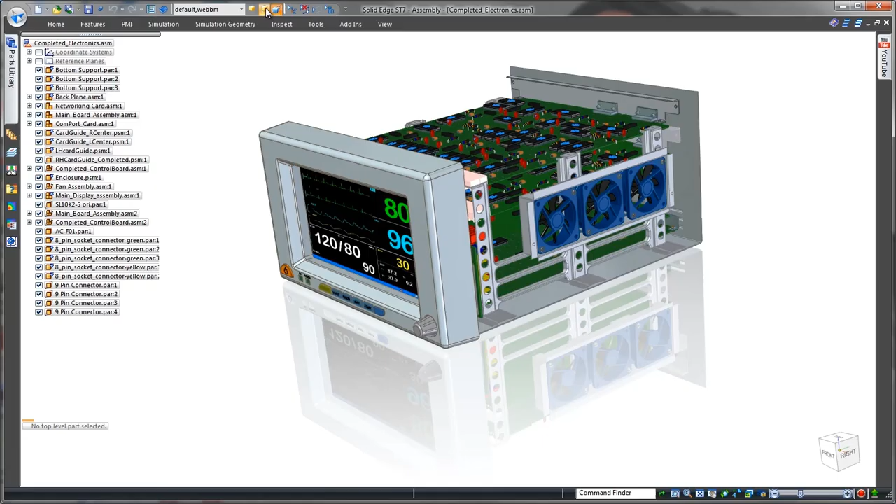We'll use Solid Edge to complete the enclosure of this heart rate monitor. Solid Edge with synchronous technology excels in sheet metal construction, allowing designers to efficiently work with surrounding components to define external product housings.

In most CAD systems, the user has to modify a part independently from the overall product assembly. With Solid Edge, additional flanges can be created at the top-level assembly just by selecting and dragging the plate's thickness faces. No special command necessary.

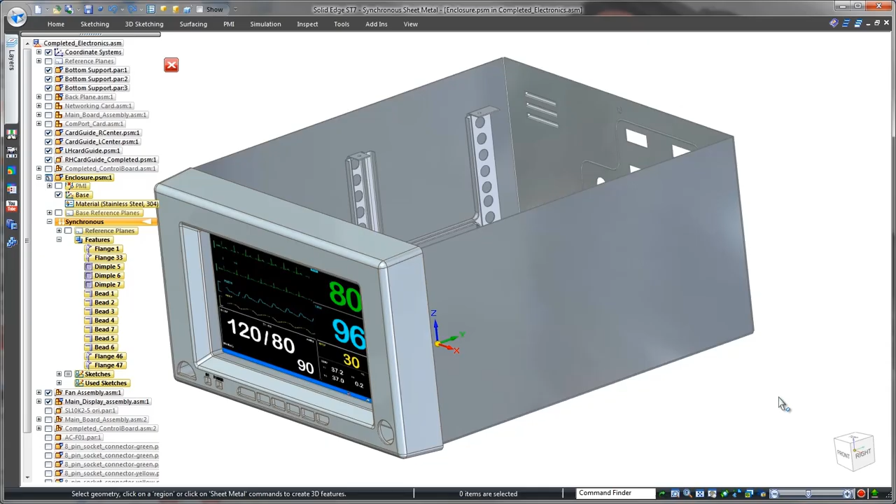Medical device manufacturers must adhere to strict government regulations, and any gaps between panels could be faulted. Using the close corner command, these gaps are eliminated.

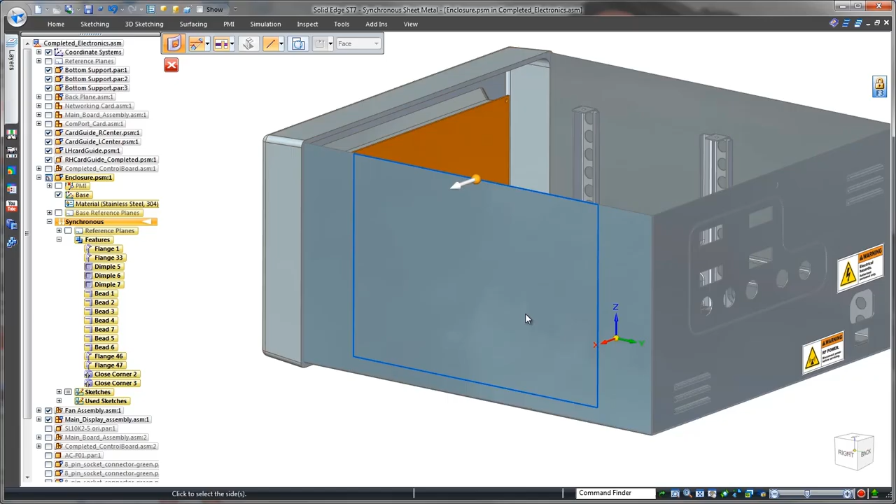The internal circuitry produces a large amount of heat, so normal operation of this monitor relies on cooling fans. To provide clearance for airflow, we'll define rectangular cuts on both sides of the enclosure. Synchronous modeling provides several methods to intuitively match the size of these openings to the shape of the fan assembly. Now that was fast and easy.

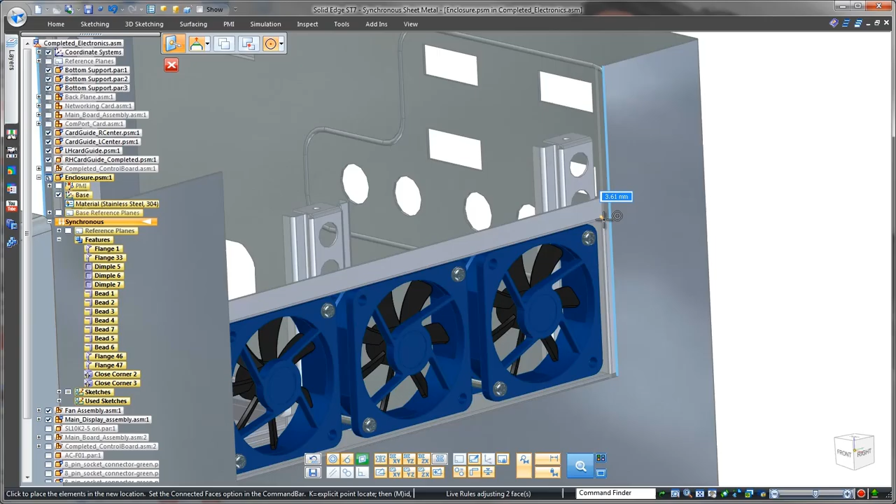Next, we need to create a locking tab for the enclosure's lid. Here we'll select the thickness face, but opt for a partial flange to create this tab. Using one of many handy options, we'll ensure its top is flush with the top of the part. We'll lock in a precise tab location using 3D dimensions.

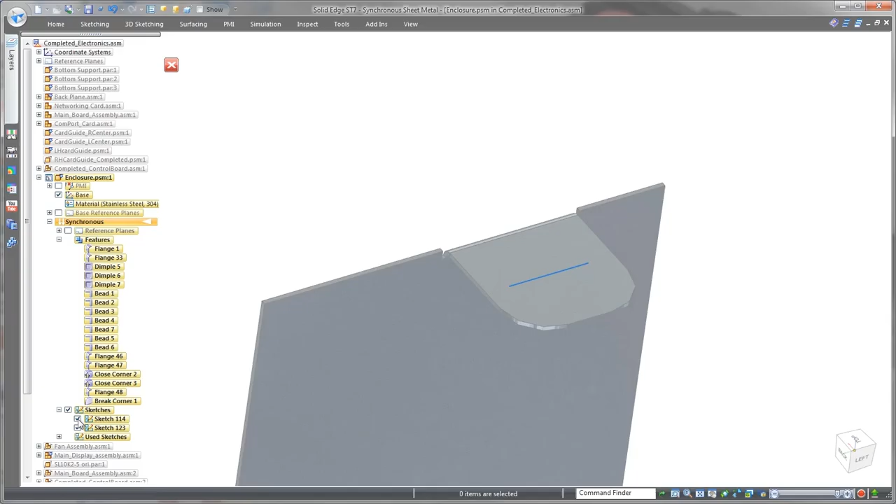To meet safety requirements, simple rounds will remove sharp corners. The locking tab requires a starting slot, and Solid Edge needs only a sketch line to create the slot. We'll place a hole in the slot to complete the locking tab.

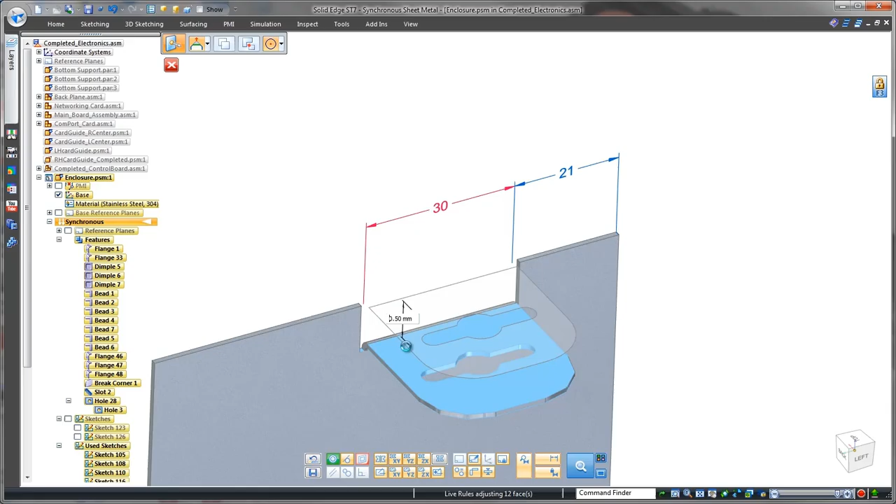We get the required clearance between the top of the locking tab and the lid by pushing the tab's top face deeper into the part. Another modification made easy. The locking tab needs to be stiffened, so we'll use the gusset command. Simply specify 2 gussets and Solid Edge automatically computes the spacing between them.

Since an identical tab is needed to lock the lid on the opposite side, we'll quickly fence select and mirror these features to the other side. This completes the design of the enclosure's base.

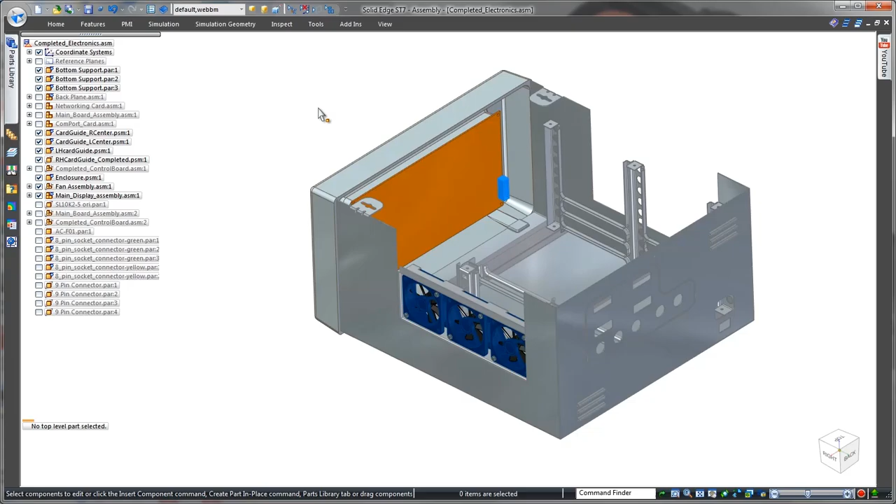Now we'll create the lid. This is where the power of Solid Edge top-down design is realized. By constructing our housing in the context of surrounding components, we can ensure all holes align and mating parts match the first time, avoiding costly rework and eliminating scrap.

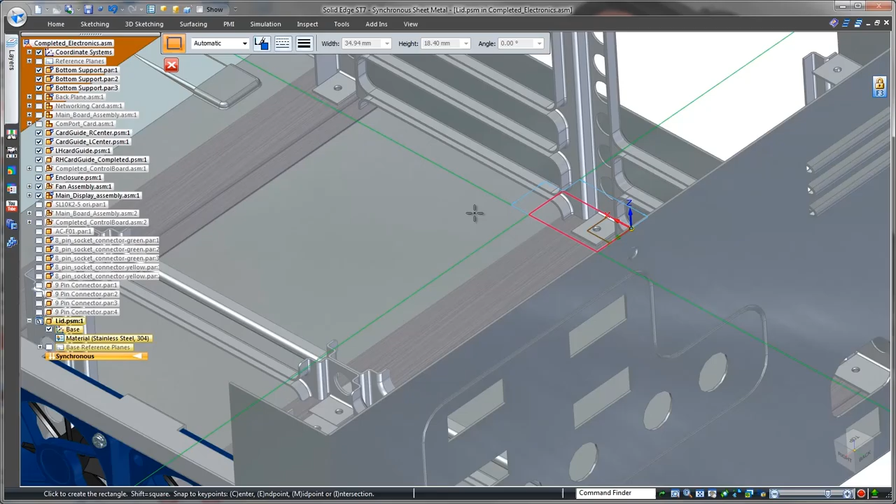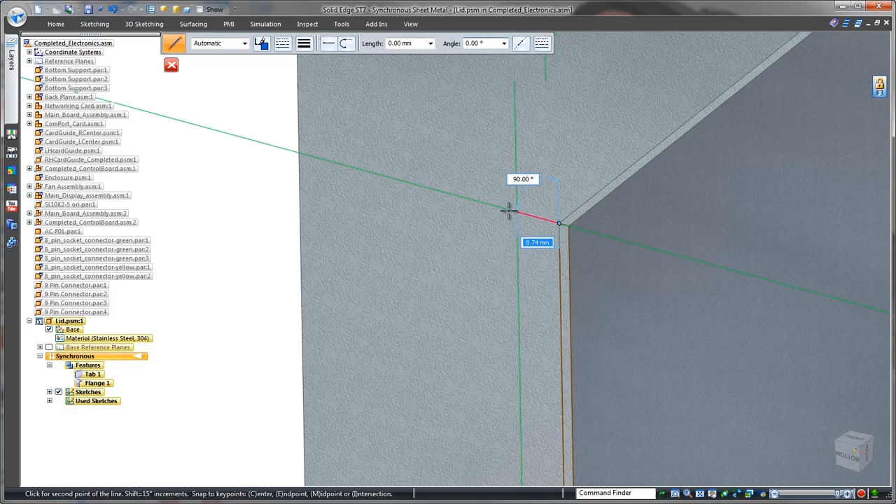As before, we'll create a new flange just by dragging the lid panel's thickness face to the length we need. On the front of the lid, we need a flange that wraps to the underside of the control panel. The contour flange command not only creates a more complex flange that will fit just right, it also allows us to close the inside corners too.

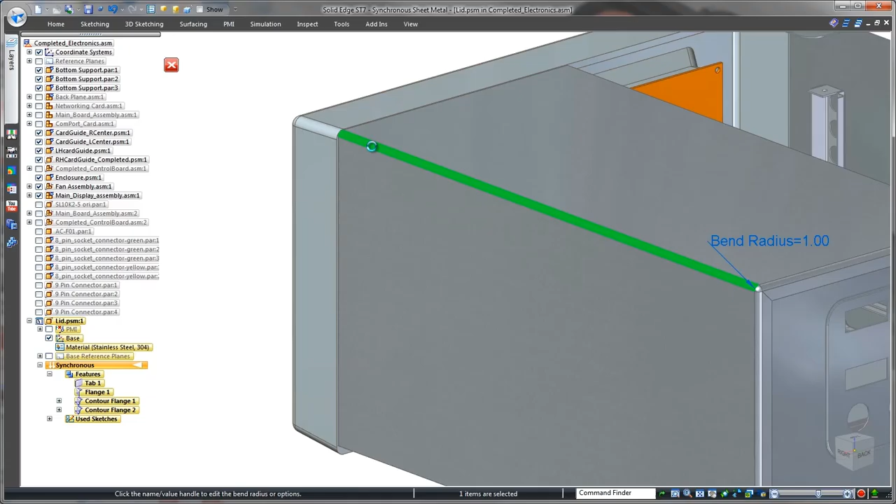Notice this bend radius doesn't match the rounded corner of the control panel. No need to access the history tree, just select the bend and change the radius. Again, that was easy. Remember the fans?

Proper operation will require a vent on the side of the lid. We'll create this vent by sketching a rectangle to define the vent's extent and patterning a hole using the fill option. It's as simple as that.

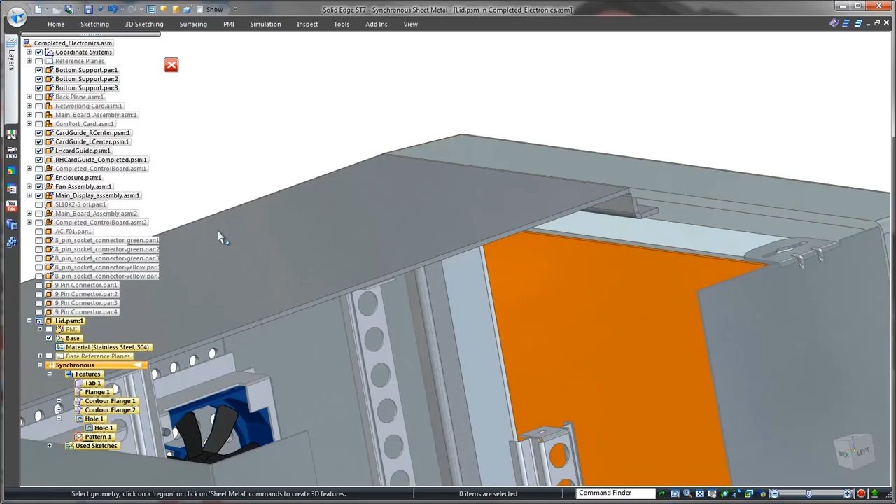Notice that we have an interference problem between the lid and the front of the control panel. Applying a synchronous relationship will move the vertical flange flush with the control panel's thickness face. That was an easy fix.

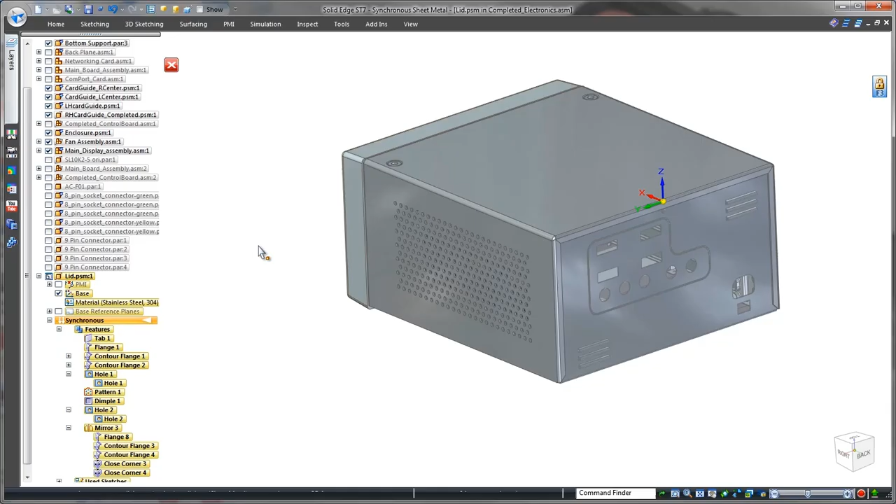We'll finish the enclosure by mirroring this lid half around the thickness face of the part. Solid Edge facilitates creation of manufacturing information, often with little user intervention. Watch as we automatically derive a bend table from the lid model. Finally, we'll generate a flat pattern for use in a downstream manufacturing drawing.

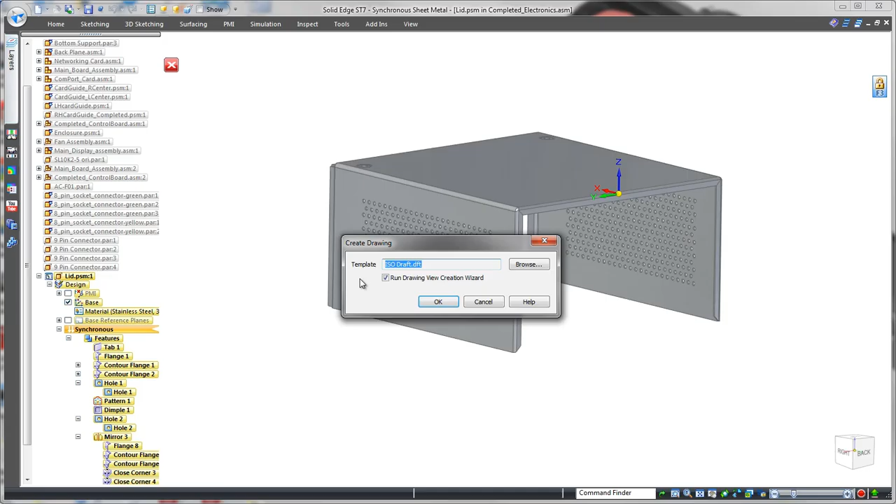In this case, we'll insert the bend table and add a few coordinate dimensions.

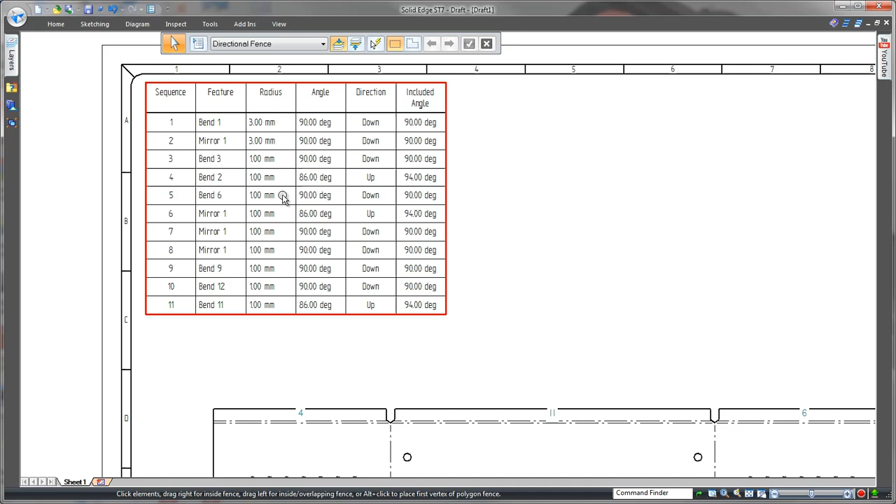Direct interaction with surrounding geometry, coupled with industry-leading sheet metal design tools and innovative modeling capabilities, makes Solid Edge the choice for companies looking for an edge over the competition.